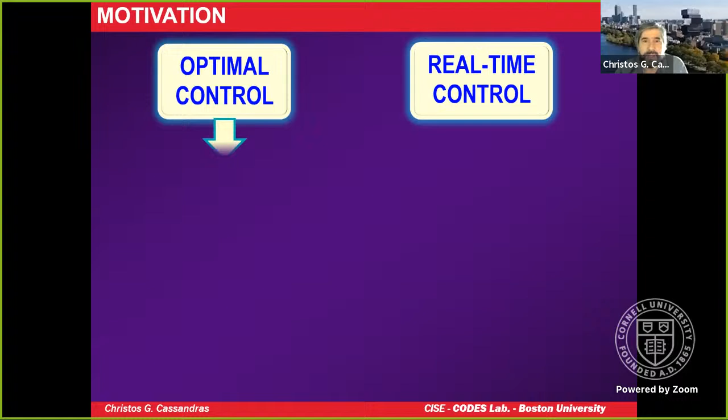I believe that when it comes to complex multi-agent system types of problems, optimal control is a very appropriate way to formulate the problems, because we can state what objectives we have for a controller, as well as include a lot of constraints that our control must satisfy, both hard safety constraints and soft safety constraints. On the left side, I list the pros and cons of the optimal control approach in this general class of problems. It can certainly lead to optimality, but the prices to pay are the difficulty in obtaining closed-form solutions when there are many constraints which become active.

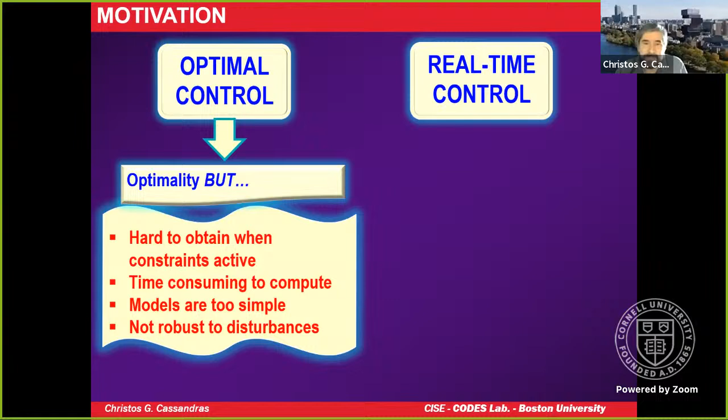It is time-consuming to compute a solution to such an optimal control problem, so that limits its applicability to real-time problems. Often, we need to resort to simple enough models to allow analytical solutions to be derived. Also, the solutions are frequently not robust to disturbances, meaning that if you made a mistake in how you selected certain parameters, or if you're operating in a time-varying environment, you have to resolve what is already a hard problem.

On the other hand, given a particular application and gaining an understanding of the specific problem, we can develop ad hoc real-time controllers, which are easier to obtain and can handle a lot of features such as nonlinearities, constraints, noise, and so on. Of course, when you choose this approach, you're going to be suboptimal, and it's actually hard to evaluate how suboptimal you are. Perhaps most importantly, for the types of problems I have become interested in, there are no guarantees for constraints. So if you want to operate in a safety-critical environment, this goes out the window.

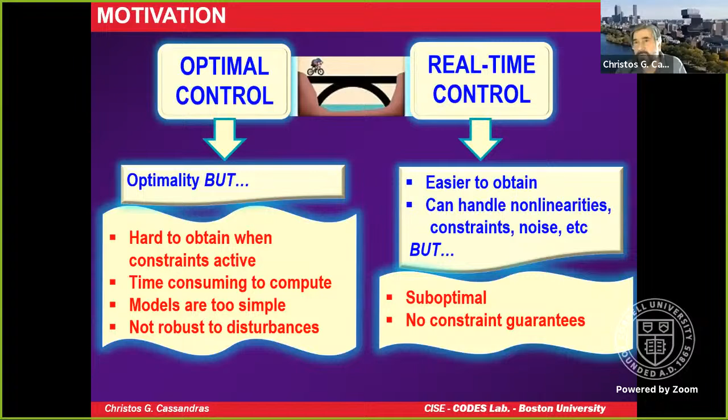So what I'm trying to talk about today is to kind of bridge this gap between the ideal optimal control approach and the more practical real-time controllers that we often devise.

Ideally, what I'd like to discuss is how we can combine optimality with safety guarantees and establish some sort of a trade-off. Obviously, we cannot work out miracles.

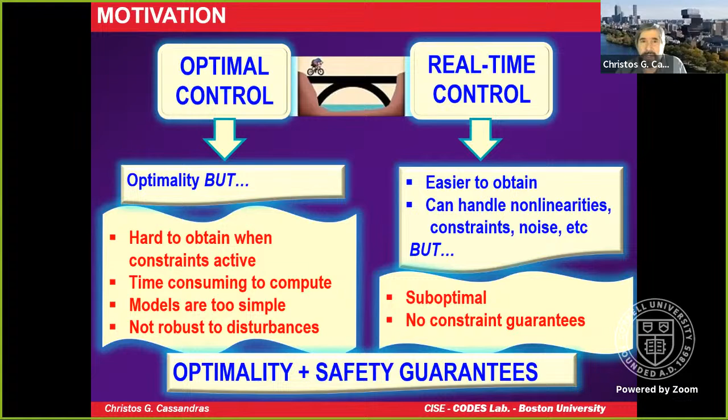From my point of view, the motivation is what we call the Internet of Cars. It's the emergence of connected autonomous vehicles, many of which are operating today. We call them CAVs because they allow the sharing of information among them through connectivity.

One of the nice promises of connected autonomous vehicles is the ability to move from a selfish to a social optimality. Selfish meaning that we each, as a driver, operate selfishly and choose to control our vehicle to achieve a certain driver-centric optimal point, whereas we could do much better if we could achieve a social optimum for the purpose of traffic control.

And ideally, if we can move into the domain of Internet of Cars, we could never stop, never need any traffic lights, which are expensive and hard to operate. So the benefits of this approach are really inspiring.

Coming back to this picture, I have on the left, once again, the optimal control approach, and on the right, a class of controllers many of you are familiar with, which we call model predictive controllers. These are easier to obtain compared to pure optimal control approaches, but they are, again, suboptimal, and sometimes it's not easy to measure the extent of that suboptimality.

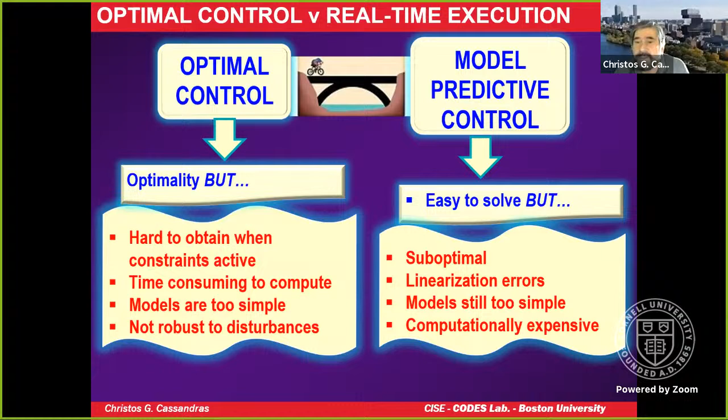The other approach is one that is based on what we call control barrier functions. These are easy to solve, the problems based on control barrier function controllers. They have a very attractive property known as forward invariance, which I will explain in a second. They allow for nonlinear dynamics and constraints, they allow for complex objectives which need not have a nice analytical form, and they tend to be robust to noise in the dynamics.

The downside of this approach is that they're, again, suboptimal, but as I will describe, they allow you to quantify the gap between suboptimality and optimality in a much easier way. And they could be possibly conservative because they tend to be myopic.

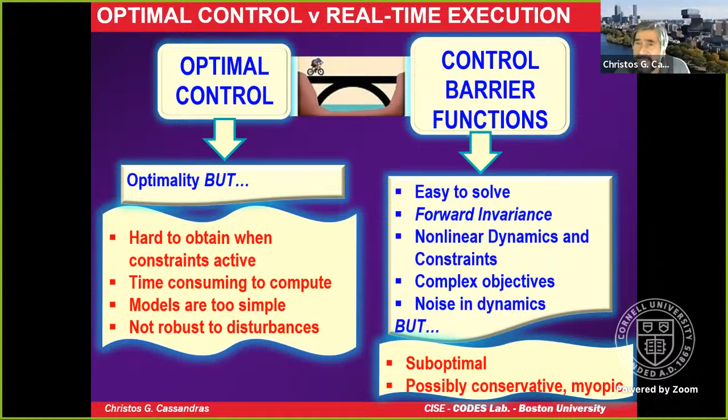So the idea in what I'm going to be talking about is to try to combine control barrier functions and model predictive control to create controllers which can then be parameterized, because each one of these techniques, MPC or CBF, is characterized by a bunch of parameters we typically tune manually. There is therefore an opportunity to use learning-based methods to learn how to tune those controllers in an optimal way.

So what I'm going to try to talk about today is this bridging of the gap between optimal control approaches and more ad hoc control approaches by combining CBFs, MPC, and reinforcement learning. The approach will be based on parameterizing the MPC and CBF controllers combined, and then tuning the various parameters that appear in those controllers through reinforcement learning.

And then I will spend the second half of this talk to discuss how this approach can be used in the context of the Internet of Cars that I mentioned, for the safe merging problem, one class of problems we encounter in the Internet of Cars.

I will close with some description of the laboratory test beds that we're developing at Boston University, so that we can move from the realm of just testing these controllers in purely simulation environments to testing them in a more real-world-like environment with mobile robots playing the role of the mobile agents.

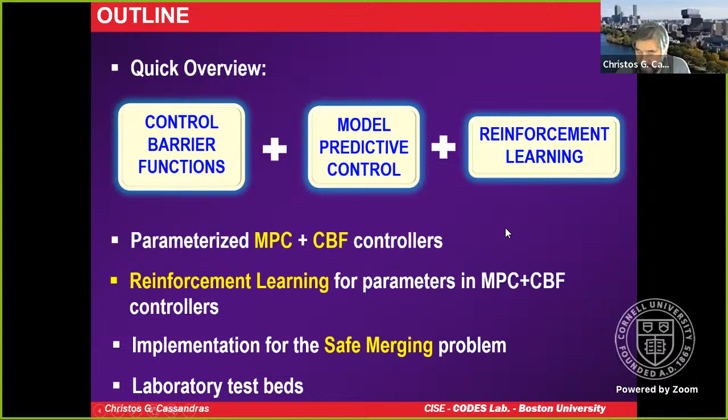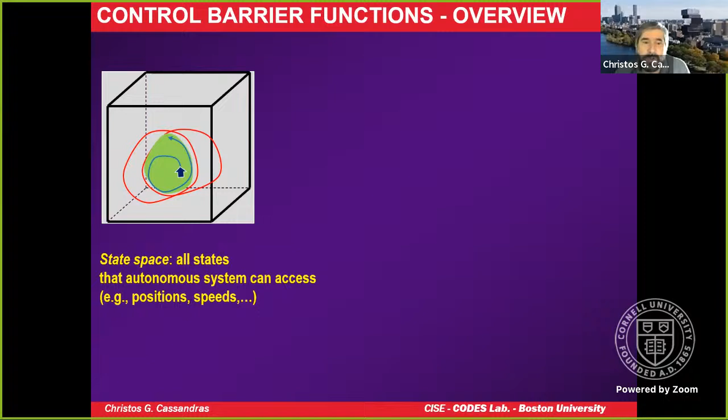Make sure that our controller always satisfies certain constraints. On the right side, what you see is the same type of picture, but with feedback control laws being applied in order to solve this problem rather than solving an open loop.

The idea here is to get the specifications that we're given for a certain problem, and then input into the feedback control space what is known or learned about the autonomous, typically, system that we're dealing with, so that we can create controllers which possess this forward invariance property that I mentioned earlier.

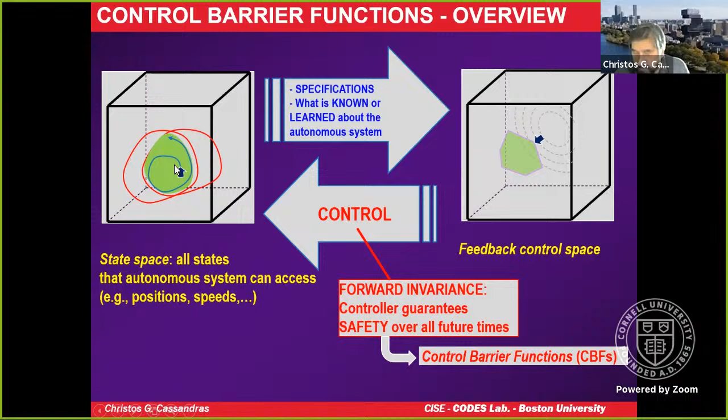What is forward invariance? It is the property of a controller to guarantee safety, in other words, remaining within the green area on the left at all times, at all future times, if you apply this type of controller, if, of course, you start in a safe state. And this is what control barrier functions can accomplish.

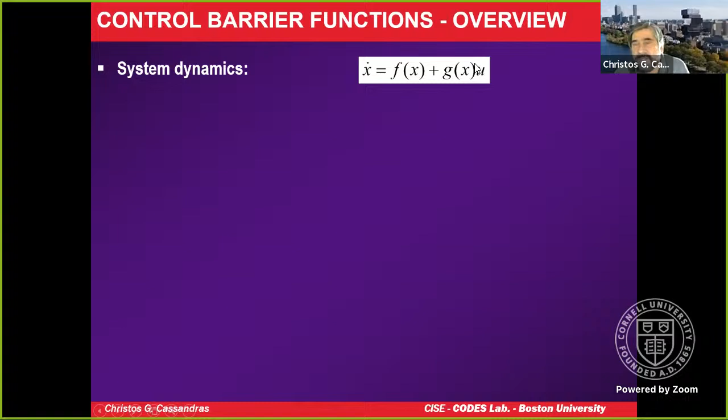Here's an overview of the CBF approach. The system dynamics that we can consider, as you can see, can be quite general. They need to be Lipschitz continuous, which is a technical requirement, but otherwise they are nonlinear, and the only limitation is that they need to be affine in control. Let me mention that even this can be relaxed in certain situations.

Now, we are going to have a bunch of constraints, which are of this general form, and notice that these are constraints described by the state of the system. So given certain states in this state space where we're operating, we can define inequalities of this form that say this is what you have to satisfy in order to stay safe.

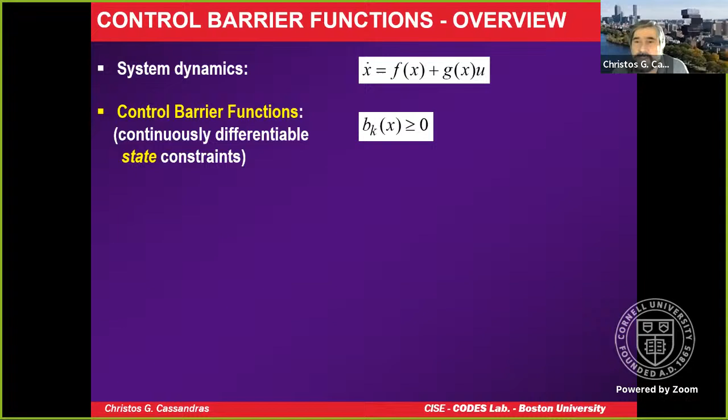The problem is that these are described in terms of the state of the system, not the control. What I'd like to know is what is the controller that can enforce these constraints? And this is exactly what the CBF approach does.

It maps each one of these CBFs, which I'm subscripting here by K to indicate that there may be many of them, so that we can get an expression which tells us what is the control that can guarantee the satisfaction of these constraints. And it turns out that this transformation has a very nice, simple form, well-defined as follows.

The CBF constraints, which of course depend on the individual state constraint that you see here, the BK, have this form. It's an inequality, and the first two terms are the Lie derivatives calculated along F and G, which are assumed to be known. If they're not known, that's another story. You have to then essentially learn the dynamics, which we can also do, but I'm not going to get into that now. The Lie derivatives, for anybody that doesn't know what they are, are of this general form.

They're basically time derivatives of any function. Here it's b. In the general definition, it's some function v, along the dynamics. So you can think of f as being sort of the x dot here, which describes the time derivative of the state. So the first two terms here that you can see are well defined.

The third term is any class K function, which is a strictly increasing function of this general form with this property, which you can select. And so you can see that this defines an inequality in U, by the way, linear, which tells you all of the controls that can guarantee the satisfaction of this constraint.

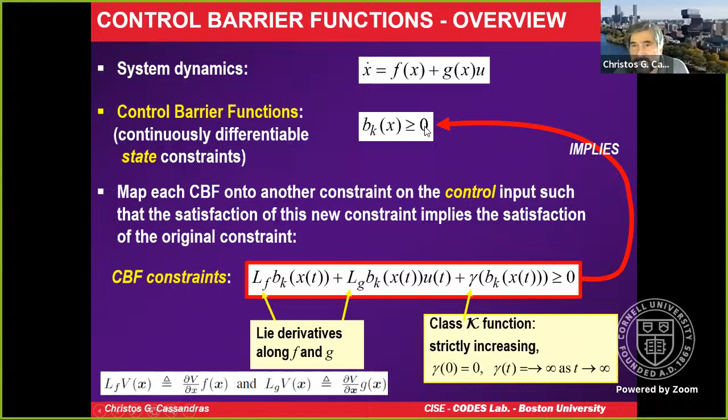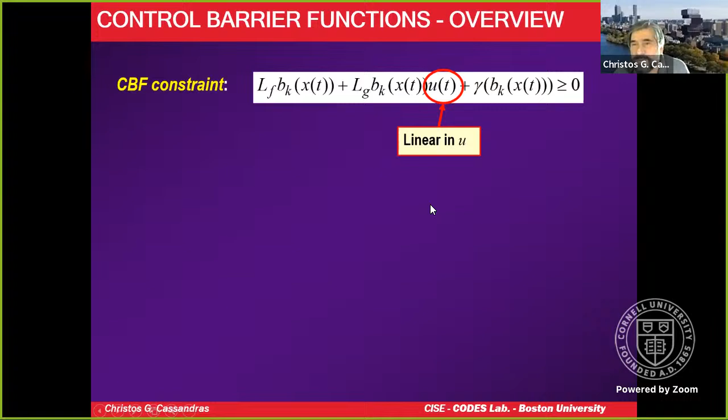So satisfaction of this condition, which allows you to calculate U, implies the satisfaction of this specification. I'm rewriting here the CBF constraint to emphasize this feature it has. It is linear in U, which is an amazing computational privilege that you have when you use this approach, because linearity is something that simplifies calculations a lot.

So, in summary, this inequality provides a set of feedback controls, simply by solving it with respect to U, that guarantees the satisfaction of the original constraints for all future times if you start out in a safe state, which justifies what we call forward invariance. I emphasize, though, that this is only a sufficient condition. It says if this is true, then the satisfaction of the initial specifications is guaranteed.

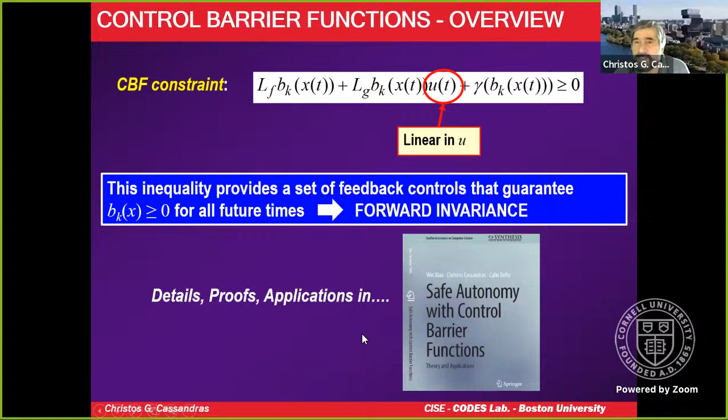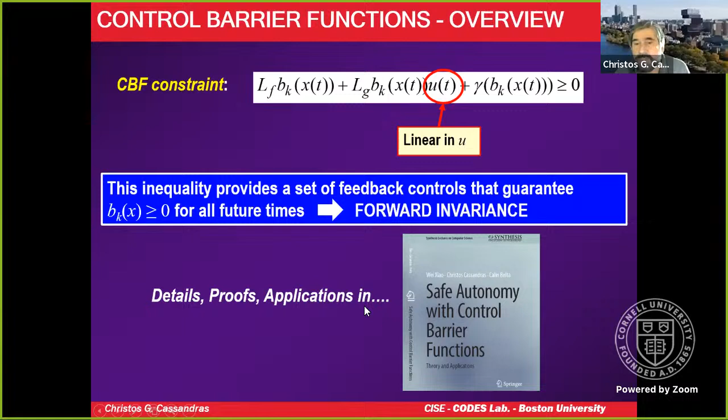There's a theory that we have developed using the CBFs to apply particularly to autonomous systems, and I refer you to this recently published book, which describes details, a lot of proofs of the theoretical results, and there are 2 chapters at the end that describe a lot of applications.

There are also some softer constraints that you don't absolutely have to satisfy, in which case there is a similar type of inequality that we can derive, which allows us to get as close as possible to a desired soft constraint, but not necessarily have to guarantee it.

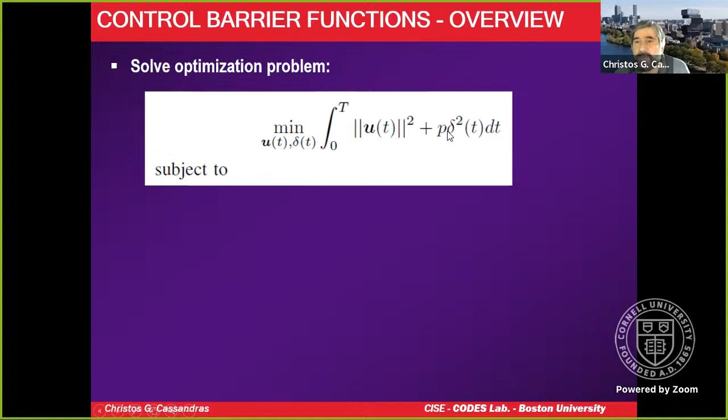Returning to an optimal control formulation, we can solve this quadratic optimization problem in which we choose our controller in a specific way to get as close as possible to an optimal solution given some objectives. At the same time, we can try to minimize this relaxation parameter, subject to the fairly general affine control dynamics mentioned earlier, the CBF constraints which characterize all of my hard original constraints, my CLF constraints which characterize the softer constraints, and control constraints on my particular feedback control law. So you can think of these two inequalities as being associated with hard safety constraints and soft constraints.

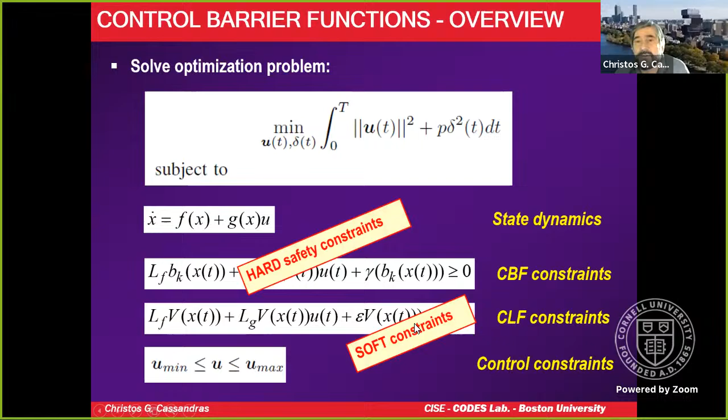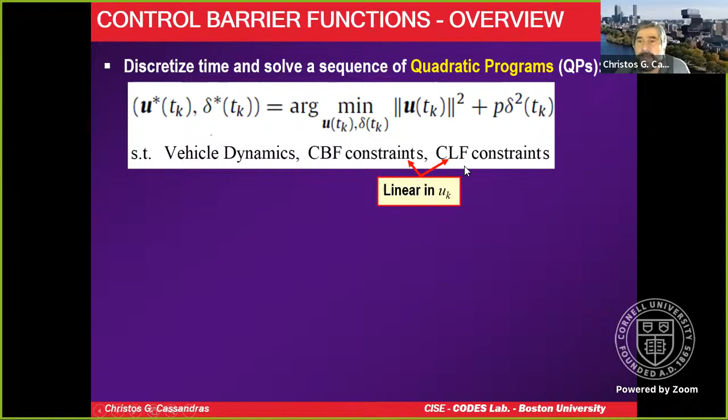In practice, to solve this optimization problem, you discretize time and at each discrete point in time you solve a quadratic program of this form, subject to the vehicle dynamics, the CBF constraints, and the CLF constraints mentioned earlier. It is important to remind you that because of the linearity of these constraints in U, this makes it a quadratic program - quadratic in the objective, linear in the controls.

How do you solve that? As I said, you discretize time, and at every discrete point in time you solve this problem, and it is easy to solve - typically a fraction of a second.

However, there is a practical complication in that you have to discretize according to some discrete time step delta t. How do you pick that? If you pick it too large, you become quite inaccurate, and you can create infeasibility in that some of these quadratic programs, when solved, no longer guarantee the initial specification, because the initial specification is derived for a continuous version of U. So if you make your discretization too coarse, you may violate this constraint.

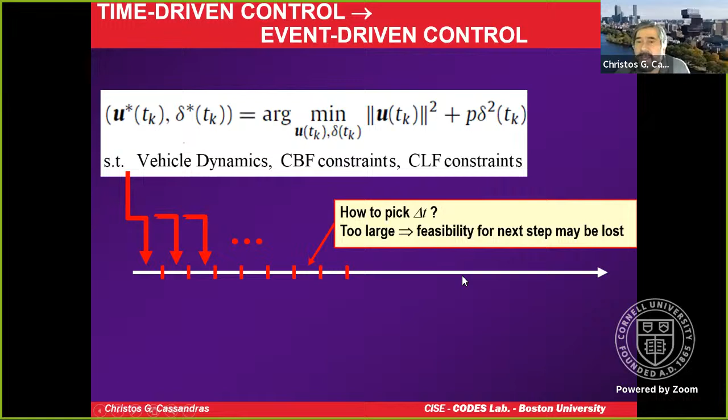So what we have actually worked on is eliminating the need for this very annoying selection of a discrete time step, and replace it with what we call an event-driven approach. We simply resolve this quadratic program only when needed. An interesting side benefit of this approach is that it increases the unpredictability of when you're going to update your controller, which contributes to extra security.

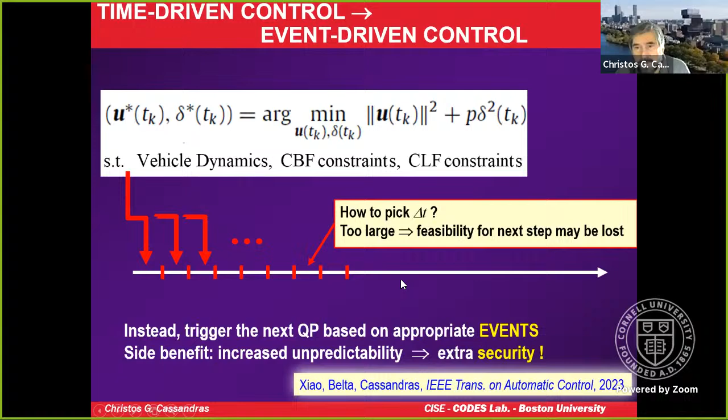A discussion and description of how this is done by solving these CBF problems in an event-driven way is described in this recent paper.

So I want to close this review of CBFs by talking about at least one of the problems it can cause, which we know how to remedy, but we have to be careful about. I show you again the basic inequality, linear in U, which tells me what controls can satisfy the original constraints bk of x greater than or equal to 0. What if this derivative here is 0, which can happen? Then I have no control over U - this second term is eliminated, and that's kind of a problem.

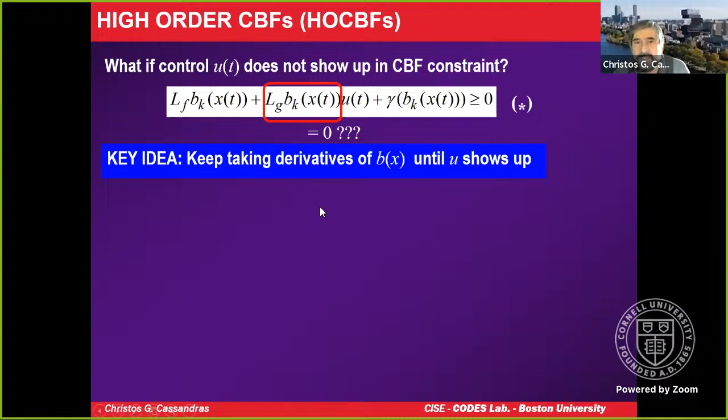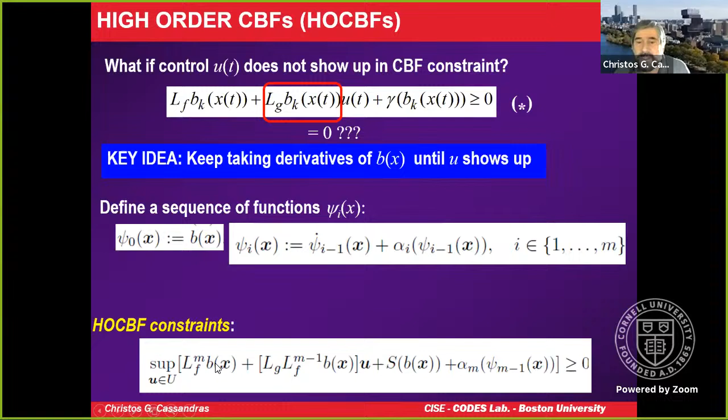To overcome this technical difficulty, the key idea is to keep taking derivatives of b, the function with respect to x, until the control U shows up. This is a standard trick used in other parts of optimal control and optimization theory in general. So instead of having a single specification b of x, we start taking derivatives, creating a sequence of functions, psi, and we are led to an extension of this inequality, indicated by star, called a high-order CBF constraint, of this general form, where m indicates the number of times you need to take a derivative until U shows up.

And this is called the relative degree of a particular function. It is the number of derivatives needed so that eventually, with respect to this function, the control shows up. So the key idea here is to keep taking derivatives of b of x.

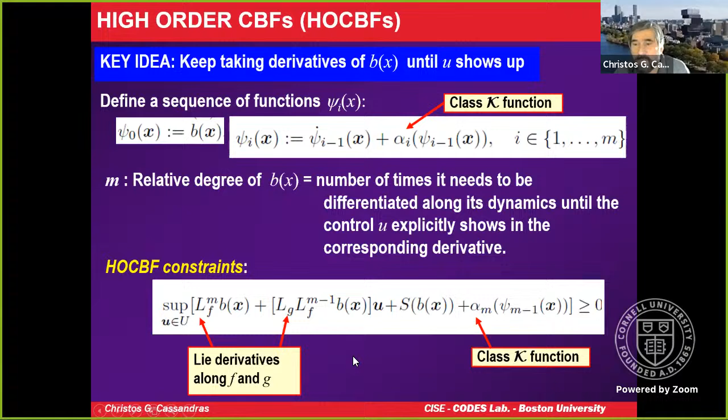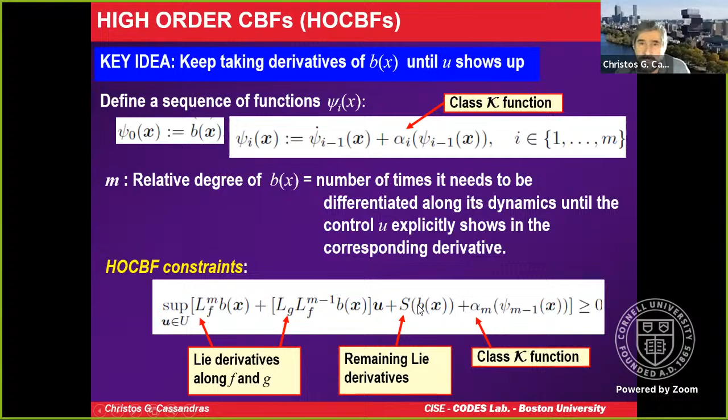This defines a sequence of functions psi, not just the base control constraint, but a state constraint that we have here. And you have to enhance your CBF constraint in this general form. I have Lie derivatives in my first two terms, except now I have to take them more than once. I have a class K function, which shows up for the m-minus-first of these functions. And this term is like a residual term, which involves all the remaining Lie derivatives when you're taking more than one. But even though it may look a little tedious, it is fairly straightforward, because if you give me a specification B, I can always calculate all of these terms. And the linearity in the control is essential.

So that closes my review of CBFs.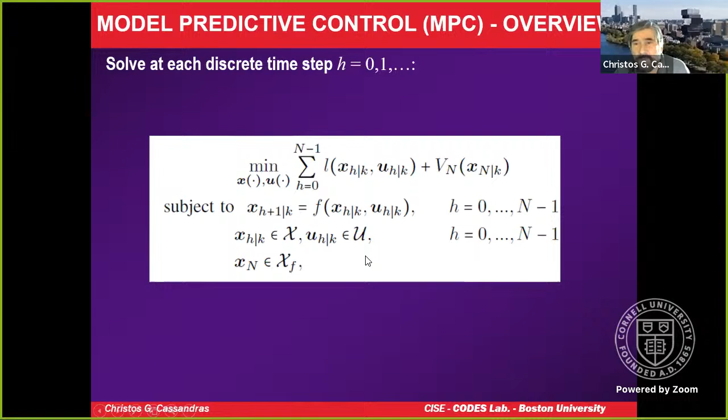What about MPC? I have a single slide here to review that, since most people are familiar with it. In MPC, you define a receding horizon, defined by a number of look-ahead steps. If you don't want to look ahead, this index h would simply be 0. But if you want to look forward, you select this number n. The larger it is, obviously this becomes more complicated to deal with, but it can be done. This is the terminal cost that you might associate with a terminal state that you need to achieve.

Notice that we have already discretized our dynamics, so the dynamics can be fairly general in terms of f. The state and control are constrained within appropriate sets, and so does the final state here. Typically this f is taken to be linear, so there's a linearization that takes place to simplify the computation.

However, if you solve this problem at any time step h, you derive a controller, and this controller is applied only at the current step. That's the whole idea of receding horizon. You apply your control only for one step, and at the next step you resolve the problem, and again apply it to the next step. So ultimately, you generate a sequence of controls over your current time and up to the look-ahead time step you wish to work with.

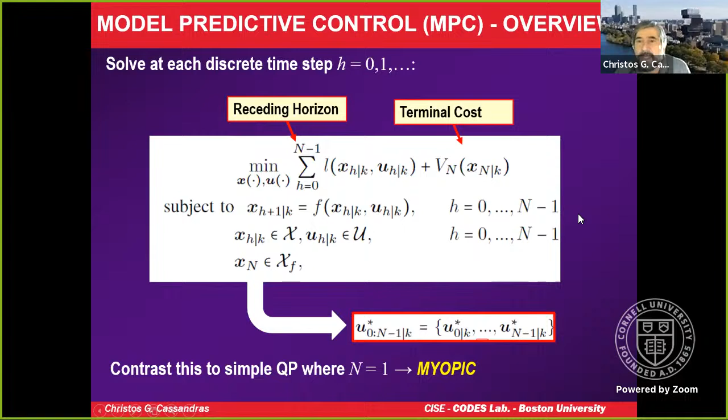And that leads us to the idea of tuning these parameters using reinforcement learning. So here's my one-page review of what reinforcement learning is about.

We now enter a stochastic domain in which we designate actions and states by AK and SK respectively, over a time step denoted by K: 0, 1, 2, and so on. Gamma is just a discount factor, which has some nice implications in terms of not allowing this infinite sum to diverge.

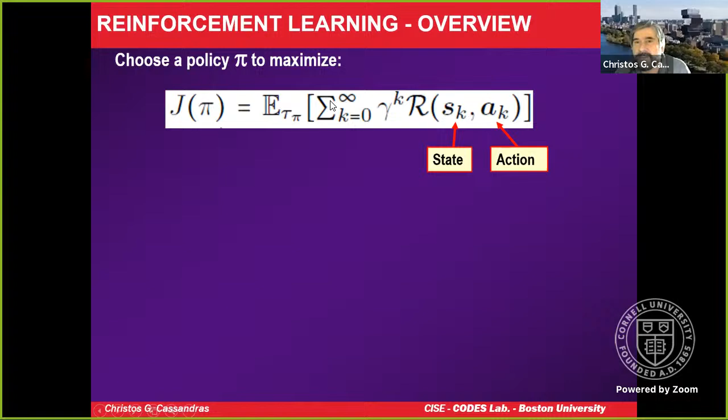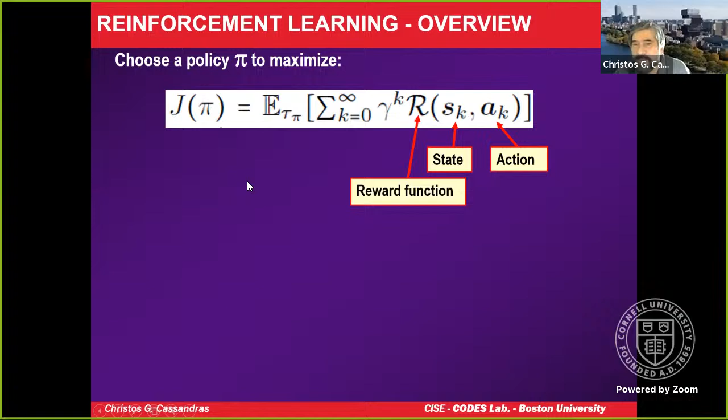I'll omit this detail. This is a reward function that you have to select in order to solve this optimization problem, maximization of this criterion. This is a big deal, because you have to pick what the reward function is. The good news is you can choose whatever you want. The bad news is you're on your own in picking a good reward function. If you don't pick a good one, you get essentially useless results.

The purpose of this optimization problem is to determine a policy that is going to maximize. It could be minimized depending on whether this is a reward. Since I call this a reward, might as well talk about maximization.

This is a trajectory of your system defined as a sequence of states and corresponding actions. So what you do is select a trajectory, sample a trajectory, and calculate these expectations over many of these trajectories you pick. Imagine that you're just simulating your system and you pick different trajectories over which it can be simulated. But those, of course, depend on the policy that you choose.

So the state is chosen from some distribution. The action is chosen also from some distribution, but that depends on the policy that you're working with. And then, of course, there's the system dynamics, which in this Markov decision process environment, are characterized by a transition probability function of this form.

The only last thing that we use in a reinforcement learning approach is the so-called state action value function, which is essentially the expectation calculation that you see here, denoted by Q subject to whatever policy you choose. So in a nutshell, if you can solve this optimization problem, the maximization of this discounted sum of rewards, then you can come up with the optimal policy that is needed.

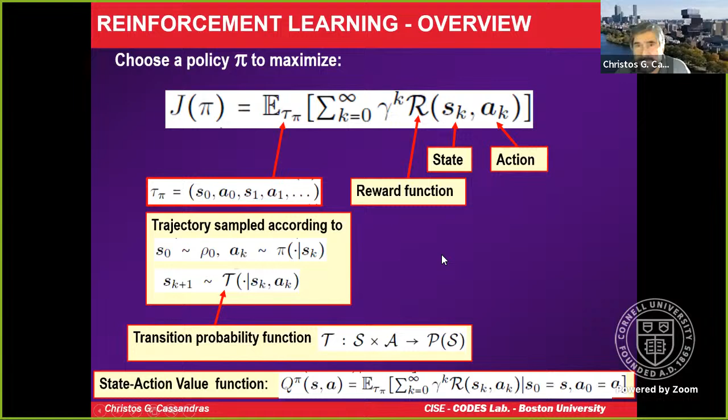Now, going back to our approach. As I said, it's a combination of MPC and CBF with some reinforcement learning thrown on top of it to tune the parameters. The system dynamics, as I said, are very general, but they are affine in control.

The hard safety constraints are given by expressions of this form. For example, if you're in a robotic team autonomous environment, then these might describe collision avoidance constraints.

The cost function that we use for our particular purpose has this form. You can see the L here is arbitrary. It's a loss function, so we're now moving into a cost or minimization problem, a loss function where we can pick it to be as nonlinear and potentially non-differentiable as needed.

So already we're moving away from the constraints of an optimal control problem formulation where your loss function has to be nice. In addition, notice that these indicator functions imposed on the hard safety constraints that we care for penalize you to infinity when you violate this constraint. Otherwise, they contribute 0. So again, this is a nonlinear way of defining your loss function so as to take into account the constraints, through this very simplistic way.

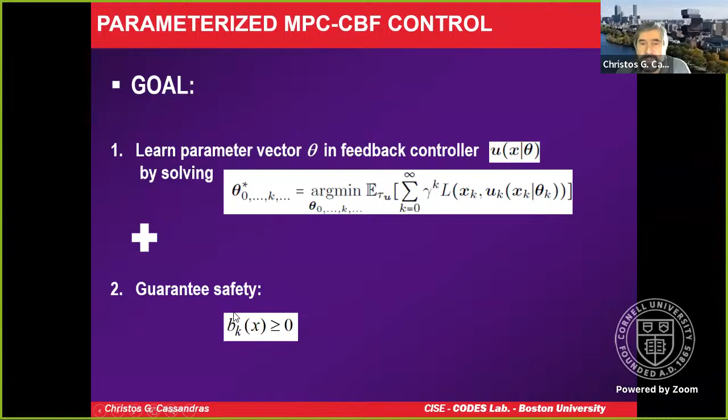But in addition, I want to make sure that I always guarantee the safe features of the controller that I designed. So it's not just about solving a reinforcement learning problem for some ad hoc controller. It's about doing that, but at all times preserving the safety guarantees which are described by these constraints.

How do we do that? If I return to the MPC problem, remember that there is a cost associated with every stage, every discrete time point, and it has this general form.

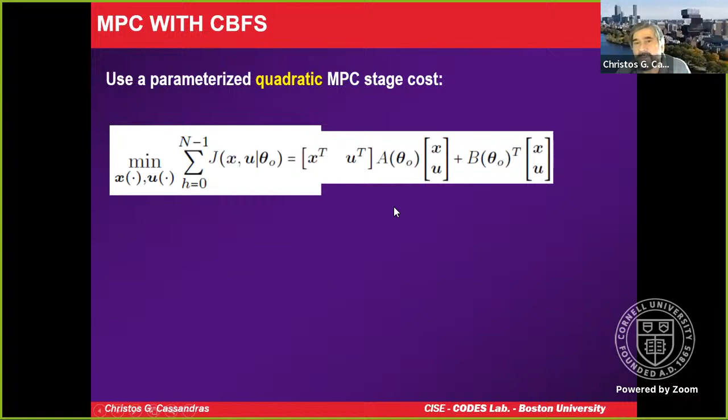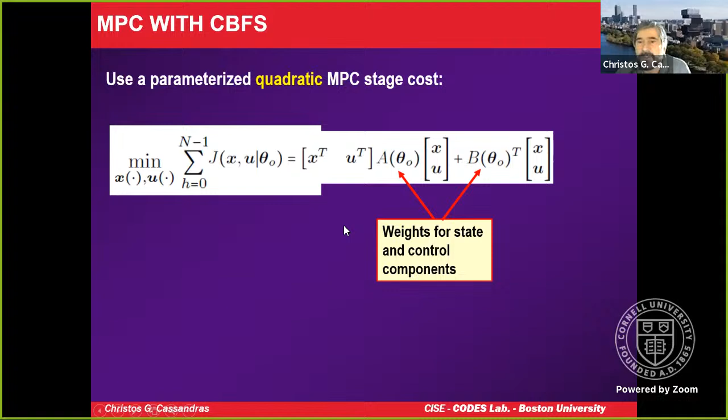Rather than using this general form, I'm going to impose a quadratic form in order to still capture the penalties associated with my state and my control, but in a quadratic way to simplify the computation. These vectors and matrices that you see here, you can think of them as just weights, attributing different importance to certain state or control components.

Before I move ahead, notice that these are, in general, parameter vectors, which have to be tuned in this cost function. In addition, if I solve my MPC problem at every stage by imposing these CBF constraints, then as I showed you in my review of CBFs, they're going to be of this general form. This is the high order CBF form, which includes this sort of residual forms.

Notice that my class K functions here, which may show up implicitly, are also parameterized, so you get to pick what class K function you want. In the simplest case, we pick linear ones, but it's important to pick them with certain parameters that make this inequality satisfied while being as tight as possible, to overcome the potential conservativeness of the CBF approach. If you pick your controller to satisfy this inequality, that implies satisfaction of this other inequality, and you can see the trade-off these parameters capture.

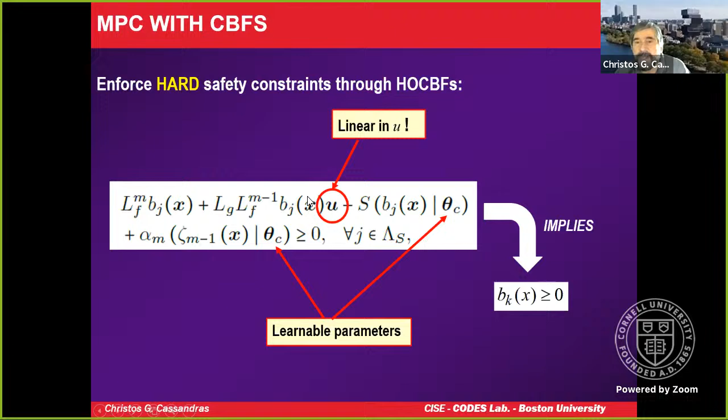There are also soft constraints, which I mentioned in this general formulation earlier. Again, there are learnable parameters here, which come through this function, and these are parameters that the reinforcement learning approach is responsible for learning. Remember, this is a relaxation variable, which is to be minimized.

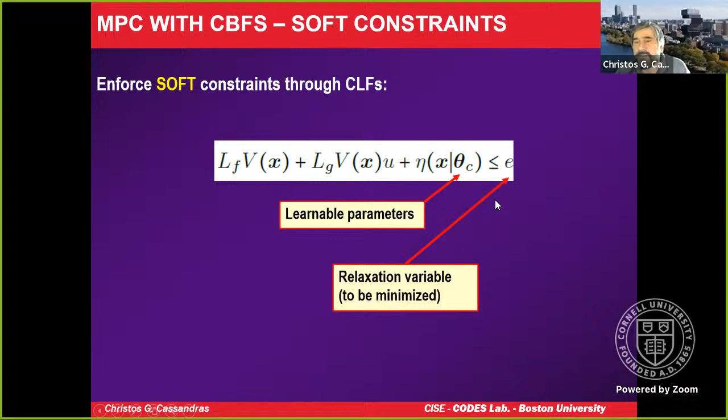So this is now the full-blown parameterized MPC-CBF optimization problem that we need to solve at every discrete time step K. I'm not doing anything here in event-driven fashion - that's the subject of ongoing research. The purpose of this slide is to show you the complete problem with all the parameters that are to be learned.

This is the cost function to be minimized. As we said earlier, this is going to be a quadratic parameterized by these parameters here, and there's another set of parameters that apply to the choice of this relaxation variable. The constraints to be satisfied are the dynamics, which can be very general and nonlinear, the control constraints, the hard safety constraints captured through these CBF constraints, and the soft constraints captured through these CLF constraints.

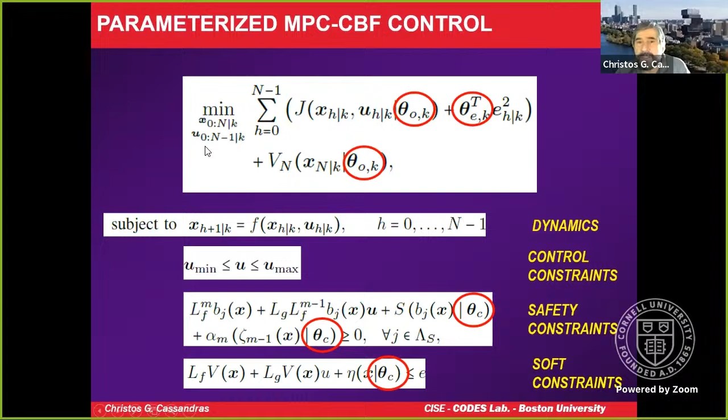I am circling here all of the parameters. I have a full problem here - if these parameters are specified, say in a baseline solving of this overall problem, I'm done. But what this approach does, inspired by the need to learn these parameters, is add a reinforcement learning component which iterates on solutions of this problem by trying to improve the choice of these parameters.

You can see there are three types of them: the ones that apply to my soft constraints, the ones that apply to the cost functions of the MPC problem, and the ones that apply to the formulation of the hard safety constraints here.

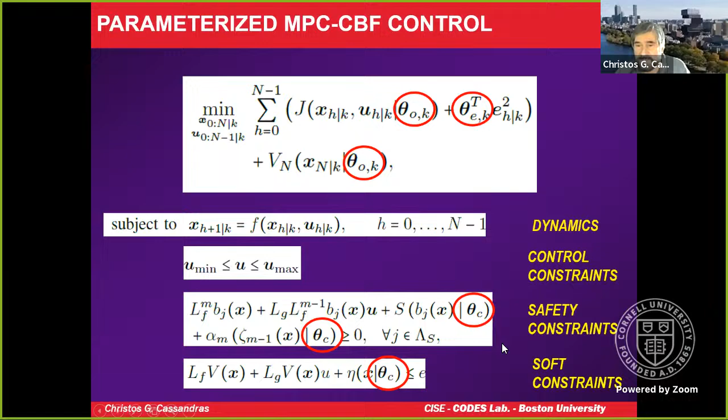Again, I remind you of the role of these parameters. These are the parameters theta sub e, that show up, as you can see here, in that they influence the relaxation parameters for my soft constraints. These are the parameters that characterize how I pick my cost function, different weights on these two components. And the last set of parameters are the ones that show up in my CBF component of the controller - the hard safety constraints and the soft safety constraints.

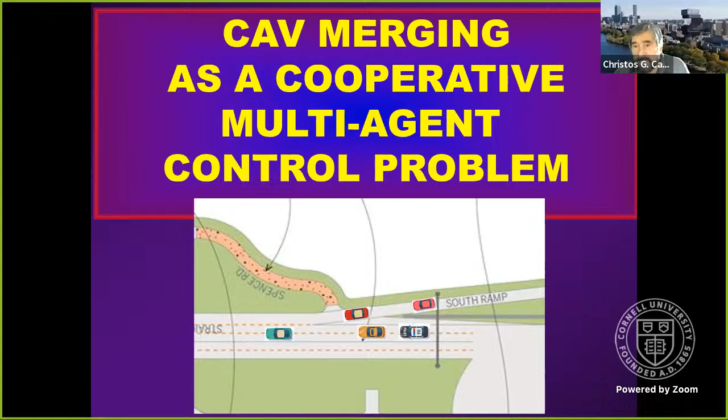So this is it. What I'd like to do for the rest of this presentation is tell you how to apply this approach to a challenging problem of safe merging, as depicted in this picture, in a multi-agent control problem where the agents are the autonomous vehicles. This problem has been looked at in the context of what we call vehicle coordination.

Lots of approaches have been used. I want to emphasize that there are centralized and decentralized approaches. Our own work, stated here at the bottom, which combines optimization with safety guarantees, is a decentralized approach.

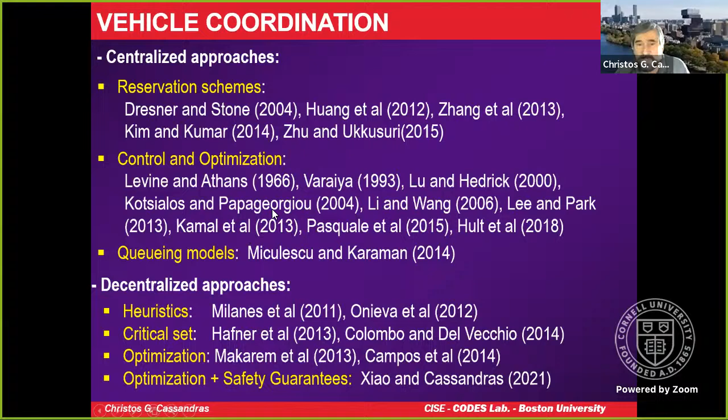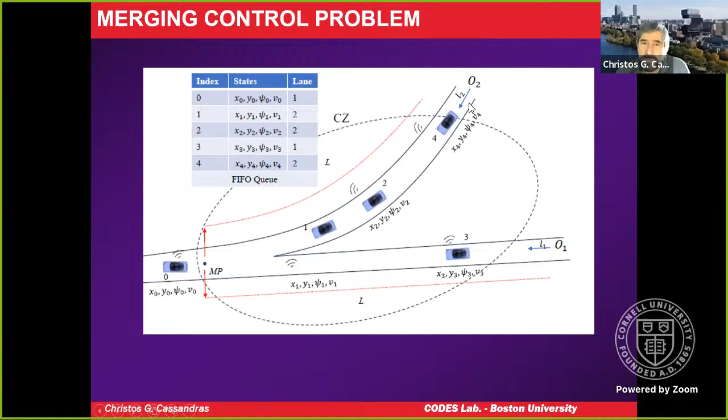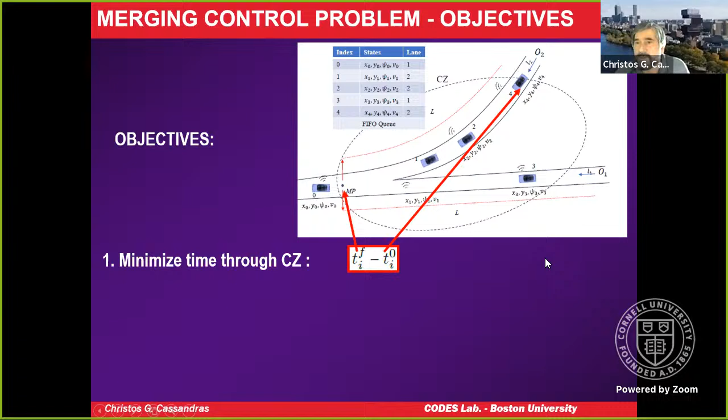What are the objectives? There are three. Number one, we'd like to minimize the time in traveling from the point you enter an area that we designate as the control zone. This is the area within which we allow our vehicles to communicate with each other, subject to various communication constraints, as well as control the vehicles in an autonomous fashion, whereas outside this control zone, I can't guarantee that I can do that. Note that if I can minimize this time, I can improve the throughput of this control zone, which is a dual form of this objective.

The second objective is to minimize the energy consumption. This is going to be a function of my acceleration, which affects the energy. Actually, it can be a function also of the speed in a general form.

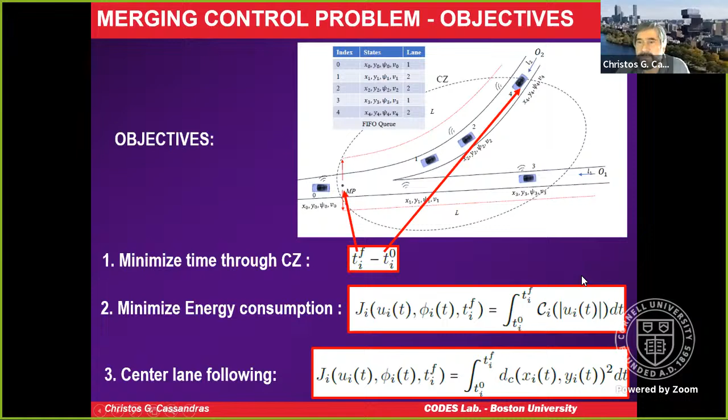Finally, we would like to make sure, since this is a two-dimensional model, that we maintain the position of our vehicles in the center lane. We don't want to get off the road, and we don't want to start oscillating around the median line of the lane we're in. This is done in a quadratic fashion, where DC would be the distance from the center lane.

The third constraint is the safe merging constraint, a very important one in the merging activity. This is a constraint that says that if I have found, based on some sequence in which these are to merge—which can be as simple as first in, first out, but it can be arbitrary—we denote the vehicle associated with i by iC, the conflict vehicle. For example, it could be 2 and 3. So as 3 is approaching the merging point, maybe the vehicle designated to conflict potentially with it is 2. The first term in this constraint, expressed as an inequality, is simply the distance between my two conflict vehicles when they arrive at this point.

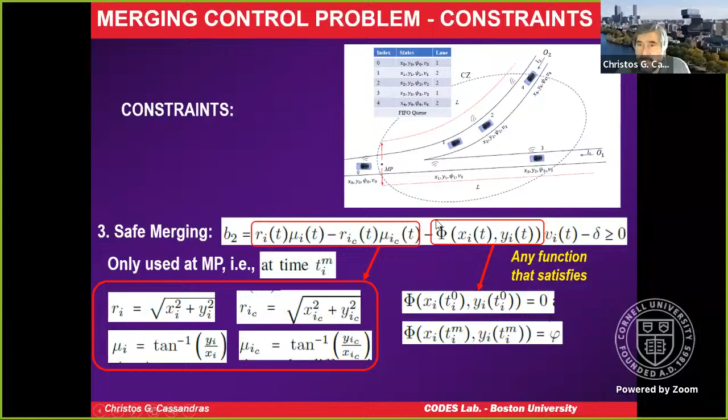These mu's account for the fact that we're not operating in a strict one-dimensional environment. This function phi can be any function you want, as long as it satisfies the fact that at time ti0, when we enter the control zone, it is 0—it's irrelevant. But most importantly, when you do get to the merging point, the value of this phi function is a typical reaction time. So the idea is that even though I formulate this constraint as applying to all times during which I'm traveling through a control zone, in fact I couldn't care less about the distance between, say, 2 and 3, or 3 and 4, except at the time when we get there.

As long as I define any function that says that when you enter the control zone this is irrelevant, and when you get to the merging point you satisfy a standard constraint that says something proportional to the speed minus a safe position distance must be greater than or equal to zero. This distance must be mitigated by this term. So this is how we formulate safe merging.

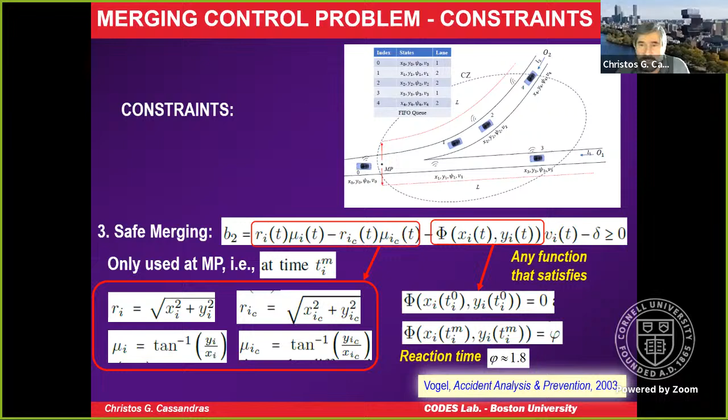My job is to take each one of these constraints that I've been showing you here, labeled 1, 2, 3, 4, and so on, and turn them into CBF constraints that tell me what control I need to enforce, for example, this B3 or this B4. This can be done by the CBF component of this approach, which we've already talked about.

I'm going to give you one single example of how any one of these initial specifications, indexed by K, of this general form, can be derived. As an example, I'll use this B3 constraint, one of those constraints that says you can't go too far, you can't go off the road in a lateral direction. This is precisely the constraint that prevents the vehicle from going off the road in this direction. How do I do that?

I take my B3, which has this form, and I take the Lie derivative—basically a time derivative. The important thing is that when you take the time derivative of this, you get this expression, which comes out of the dynamics. But you observe that you run into the problem I mentioned earlier: there's a zero coefficient of ui. Basically, ui doesn't show up in the derivative of this. That's a problem, but we know how to overcome it using high-order CBFs.

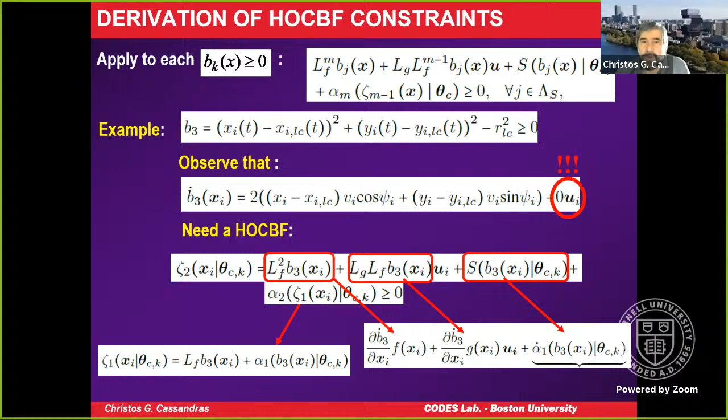Once you do that, you are in business to apply your reinforcement learning, which we show here. This is done by training each one of our participating autonomous agents. But since every autonomous agent may interact with the vehicle ahead of it—in this case, this IP—and the vehicle with which it may collide at the merging point, which has already been determined, I need to train my vehicle with respect to the behavior of these other two agents as well.

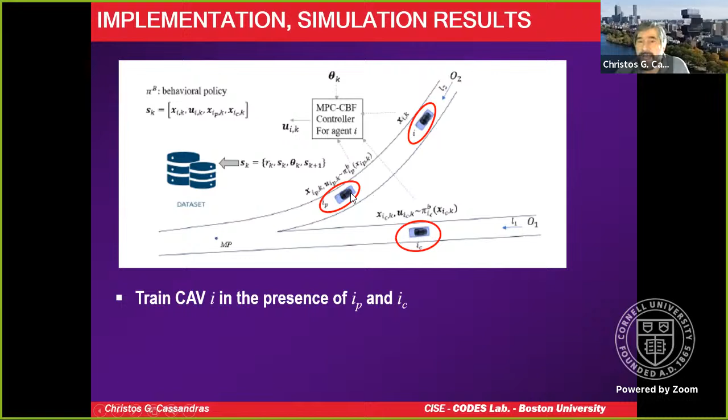So what we do is choose baseline behaviors, essentially arbitrary, according to some policy for these vehicles, and all three of them participate in this training process for any i. So for any i, there are going to be two more vehicles involved in the training process. The way these other two vehicles behave is chosen from what we call behavioral policies.

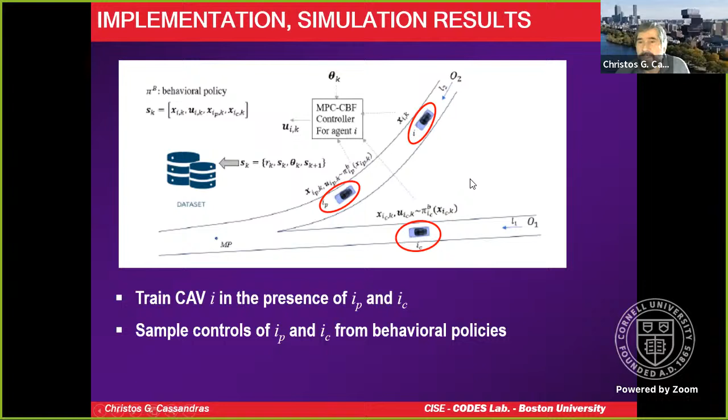In this particular case, what we do is simply randomly pick some parameters to determine the performance of this IP and the IC, without any optimization of the parameters—just random parameters. That could be bad; that's the whole idea. If you start out with poorly chosen policies, you will improve them by improving the parameters that determine those policies.

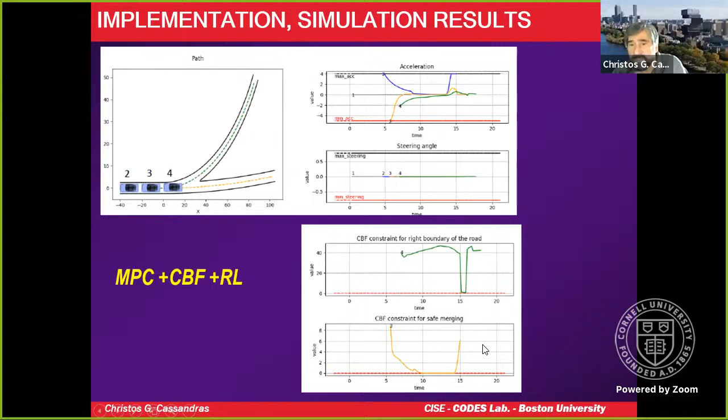These are some tabulated results that show the performance in terms of average travel time, the desire to maintain U as close to 0 as possible, the fuel consumption which can be quite complicated, and then the total infeasibility.

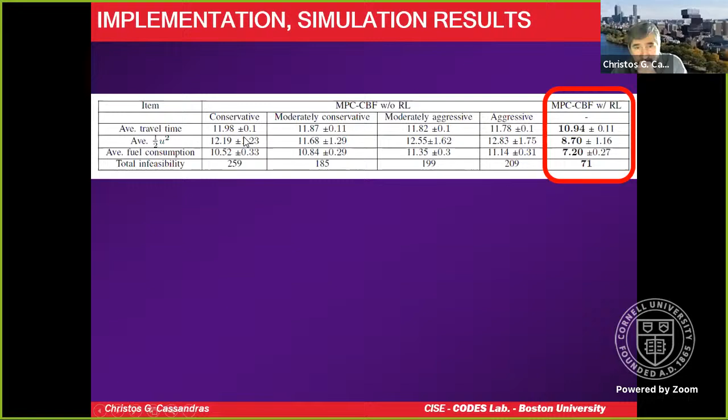This is the number of times that you violate your CBF constraints. Notice there are improvements here, about 10 or 11 percent, a small type of improvement in the time, much more pronounced improvement in the U-square metric and the fuel consumption, and most importantly, perhaps more safety—there's a 65% reduction in the number of cases where you violated a CBF inequality constraint.

However, I want to emphasize that just because you violate the CBF constraint, that does not imply that you violate the original constraint, because remember, this is a sufficient condition. CBF constraint is a sufficient condition. So if you're very conservative, you're going to violate perhaps this constraint quite often.

For example, notice here that the four classes of behavioral policies we considered involve conservative, moderately aggressive approaches. When you're very conservative, you violate this constraint a lot, but that doesn't mean that you collide or anything—it just means that you're no longer able to guarantee safety. And this number of infeasibility cases is drastically reduced.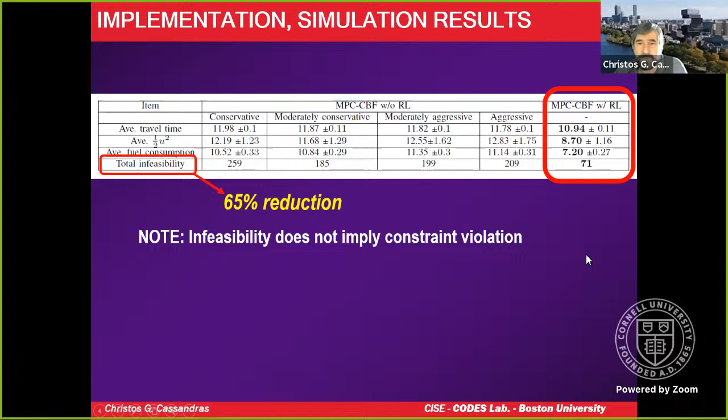There are a lot of open questions that remain, even though with the presence of the reinforcement learning component and the look-ahead capability that MPC imposes, we have been able to provide these improvements. There remains an interesting question as to how many CAVs I really need to realize the benefits of my approach. Notice that everything I've talked about so far assumes that all the vehicles, all the agents in my system, are autonomous. And obviously we'd like to get away from that because we are going to have some human-driven vehicles to deal with.

How do we integrate CAVs with other elements in the transportation system, like pedestrians and bicycles? How do we use economic control incentives to incentivize compliance of human-driven vehicles to achieve social optimality? There's also the issue of whether we want to continue assuming a system in which everybody drives and owns their own vehicle, when we know typical car utilization is only 4%. That brings us into the active research domain of mobility on demand.

And what about learning online? The approach I described is an offline approach where I train quite intensely. It takes time to train my autonomous system, and in particular my autonomous vehicles, to tune those parameters as I showed you. So I want to close with a few parting thoughts on answering these questions.

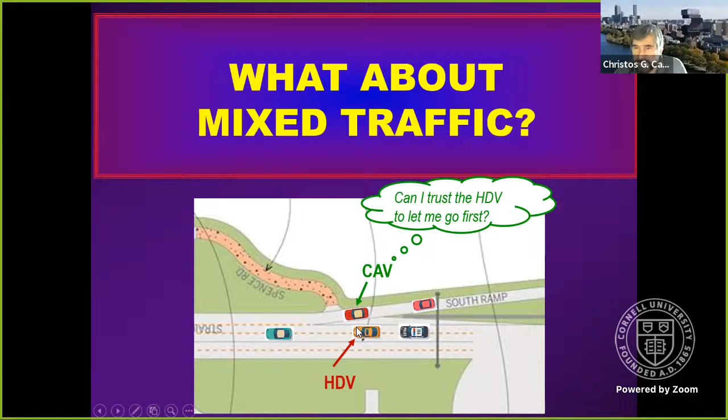What about mixed traffic? For instance, in this merging approach, when a CAV is approaching and about to merge, if it knows it may conflict with a human-driven vehicle, no longer one I can trust since I've been cooperating with it, I have to ask: can I trust the HDV to let me go first, since I'm a bit ahead of it in this scenario? I don't know the answer unless we develop techniques that enlarge the class of problems from one where all agents are autonomous and cooperating, to one where only a subset cooperate and the rest are non-cooperative. Not necessarily antagonistic, because most HDVs are not suicidal. They're not going to try to collide with you, but they're definitely not cooperating.

We know there are benefits from connecting autonomous vehicles: enhanced safety, reduced congestion, reduced energy consumption. But what do we do when we don't have 100% CAVs? My position is that there are three ways to go about that. One is to work hard on developing perception or learning-based models to better model human behavior. The other is to prioritize safety over performance optimization, trying to optimize our system in a way that eliminates the unpredictability of the human. Another way is to develop cooperation compliance mechanisms with economic incentives. All three approaches, potentially in conjunction, are very important.

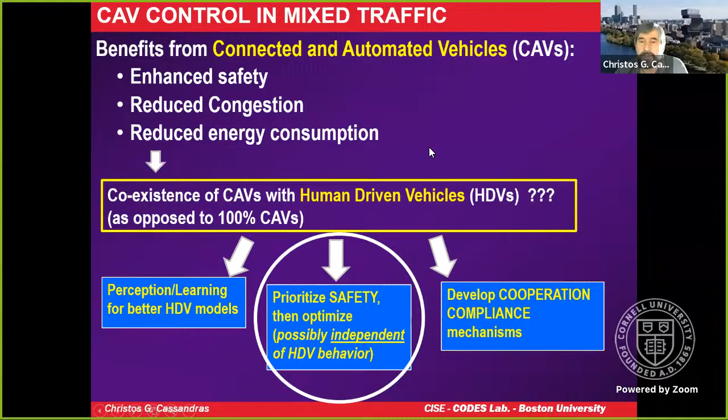I'll share a quick result we recently obtained on this approach, which is encouraging in that it shows sometimes you don't have to worry too much about predicting how humans behave, you can simply force them to behave in a socially optimal way. This is easily depicted and theoretically analyzed in what we call the lane-changing maneuver, in which the two green vehicles are CAVs that can cooperate, and the red vehicle is a human-driven vehicle that may not cooperate.

Notice that when it comes to this controllable CAV, C, deciding how to merge into this lane, it has two choices: it can go ahead of CAV1, or it can try to squeeze between CAV1 and the HDV. We can solve an optimization problem: supposing this is the way to go, I can determine the optimal cost and control for this maneuver. If you evaluate both cases and compare them, you find which one is better and choose it.

The important thing to observe is that case 2 is one in which the HDV behavior is irrelevant. If I choose to merge ahead of CAV1, likely CAV1 will decelerate a little while I accelerate to let me go ahead of it. That will force the HDV to decelerate, but it has no choice, it has to decelerate so as not to collide with me. This is how we can force a desired socially optimal behavior on human-driven vehicles. Theoretically, we can prove that the optimal cost of this merge-ahead-of-CAV1 policy, which makes the HDV irrelevant, is monotonic in the distance between the two vehicles.

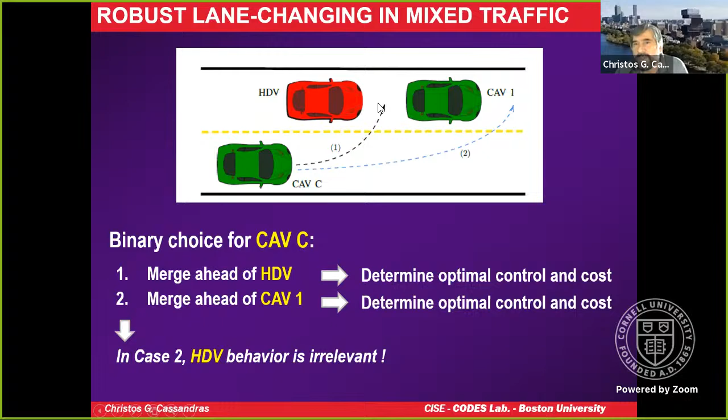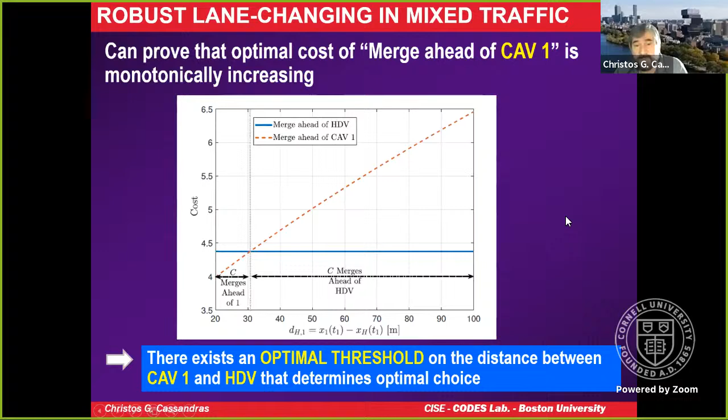The intuition is very clear. If the distance is large, then it's safe enough to merge ahead of the HDV because the distance is so large that it becomes essentially irrelevant how the HDV behaves, unless it's absolutely crazy and very close to the threshold and decides to accelerate like crazy to hit you when you try to merge ahead of it. Otherwise it's basically safe to operate in this regime. So there exists an optimal threshold on the distance between CAV1 and HDV that determines this optimal choice.

We'll close by showing you some pictures of our environment in the robotics laboratory at Boston University, in which we have implemented—if you go to this website on YouTube, you can see videos showing how we have applied our approach on these 5 mobile robots in this example that represents the merging problem.

Most recently, we're developing a new laboratory in which our entire floor is going to be a video screen. This is a sample in which I show you this. The advantage is that you can project on the floor any landscape that you like—a city environment, urban environment, highways, whatever—and you can switch between them in seconds.

The additional advantage is that you don't need a lot of these expensive mobile robots to operate, because in the virtual environment, you can barely see it here, but there is a virtual vehicle in the simulation of this setting. So we can have our real robots interact with our virtual robots. For instance, this could be my autonomous vehicles, and this could be my HDVs, so as to create these scenarios in which we can further test our various approaches that I've been describing here.

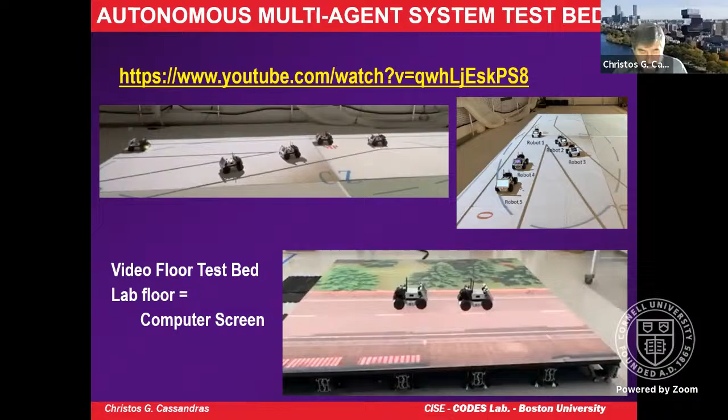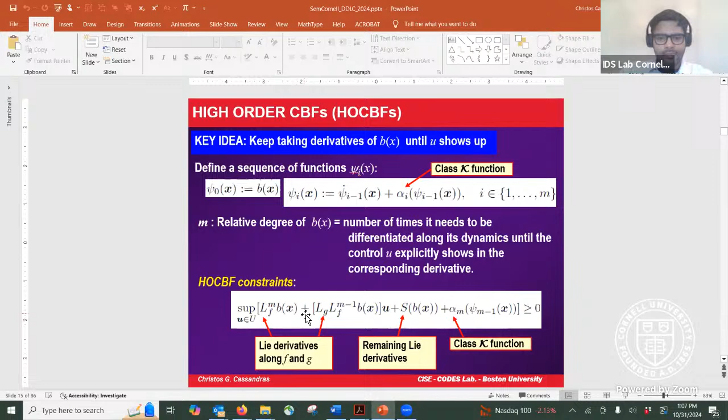Personally, I have a question. When we do higher order derivatives, I see that we switch between the Lie derivative along G and along F. In the basic CBF, there was one term—the first was LF, and the second was LG. But when we consider the higher order constraint, the higher derivatives are computed with respect to LF. Is there any intuition to understand what's going on? I think what you're saying is that in this base form with a single derivative, the second term shows only a Lie derivative along the G part of the dynamics, but when I go to degree greater than 1, an LF term shows up. That's the price to pay, because now some information comes into this component of the inequality that is due to the F dynamics. Does that answer your question?

Yes, so the intuition is that you need some information here. You don't need any information on the F, but the minute this is 0, I need to know why it's 0, and how can I compensate for that. The answer is by evaluating this derivative, and if it's 0, I need more derivatives until this bracket term is not 0. Okay, yeah, that makes sense.

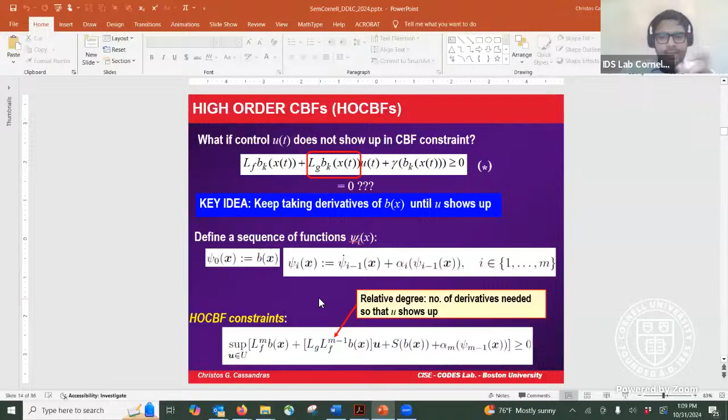The next question is, given that k class functions are linear, does the parameterization of these functions refer only to the coefficients? And what should we expect from different types of k class functions in terms of conservativeness? Yes, I think that's a valid question that I also have.

So most of the time we limit ourselves to linear functions for the obvious reason that they're simple and seem to work well enough in the practical problems we've encountered. But one should wonder, why not use a general polynomial function? The obvious answer is you have too many parameters to tune.

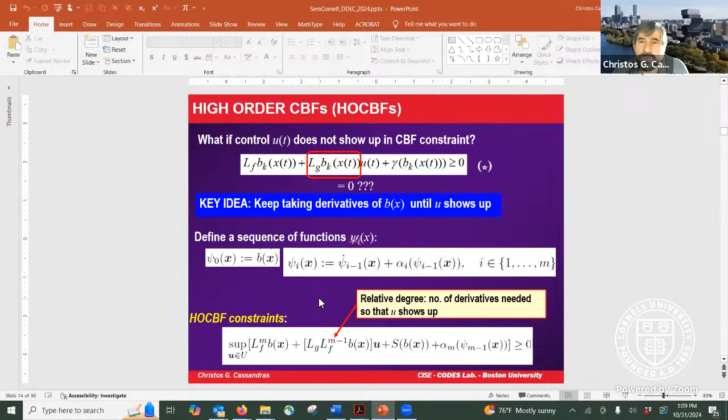But once we've broken the ice using this reinforcement learning approach, we already know how to control a lot of parameters. In fact, when we first applied this approach, here is the parameter vector. I was surprised that even in the simplest possible case, we need about 20 or so parameters, because these are all vectors. If you introduce more parameters, you need to worry about more tuning, more learning, more complications that are technical in nature, like local optimalities. But I think this is a very valid question, and something I'd like to research more.

Thank you. And there's one last question about the RL algorithm we use to solve the problem. In your flowchart, there's this RL algorithm you use to generate a number of episodes, right? So the question is, does it require the reward function to have any properties such as continuity or differentiability?

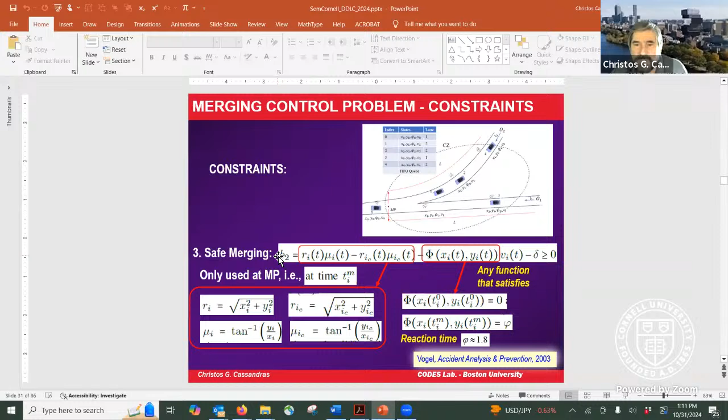This comes out of a physics-inspired model. I have no control over that. If experts tell me this is the best way to model fuel consumption, I've got to respect that and use it. It's got a polynomial expression, so that's not too bad. But typically in these models, when you decelerate, you do not consume any energy.

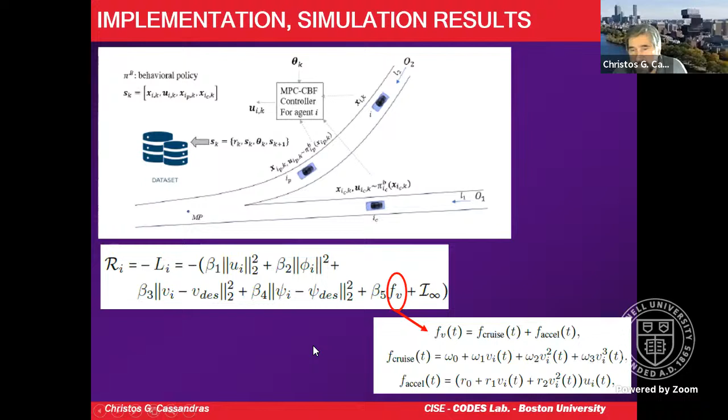This isn't shown in this expression, but you do not consume any energy. So there's a non-linear discontinuity there, which can make things complicated, but so does this—this is a 0 or infinity type of term. The purpose of this is to shock your reward or loss when you violate a constraint, and make sure you don't do it again. Generally speaking, I don't think the exact precise nature of these functions matters that much once you start using them in a numerical sense.

These are numerically based techniques. You just evaluate this term, this term, this term numerically, and then try to learn from it. But I cannot definitively answer that question by saying yes, it has to have these properties or not. This is part of the black magic of these learning techniques.